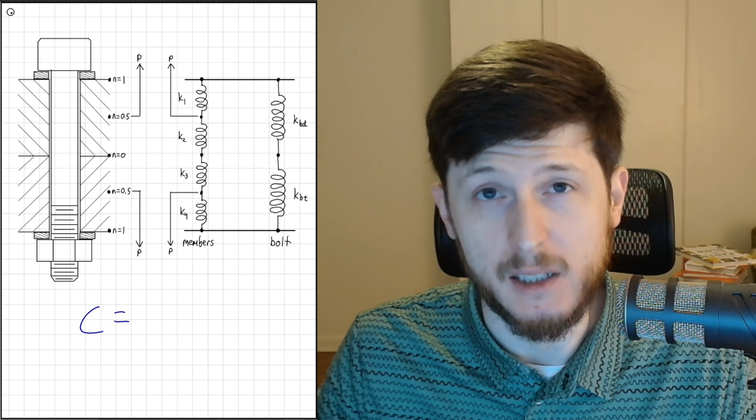This works because everything basically acts like a spring. The bolts are elastic. I'm not really going to get into how this works here. You'll just have to take my word for it, but just know that the stiffness constant is the bolt over the bolt plus the members. And so that is how the bolt ends up carrying 20%, and the members, or the energy that's stored in them, carries over 80% of any external loads.

So how do you measure preload? Well, the most common way, and you're probably aware of it, is the torque wrench. You use it to set the amount of torque that either is applied to the nut or the head of the bolt. It's not super accurate, at about plus or minus 25%. You might be wondering why we use it when most of the other methods are more accurate, and that's because it's easy, cheap, and most of the time it's good enough.

Another great way to measure this is with bolt elongation. That actually checks how much the bolt stretches under a known load. You can see here that bolt elongation is plus or minus 5%, which is way better, but it's much more difficult to actually measure. So here's a slightly closer look at bolt stretch, since that's what we're going to be using today to check how much of our torque actually turns into preload.

The formula here is deflection is equal to the preload times the length of the bolt that's actually in the grip, which is like in this area, all over the area times Young's modulus. So it's not a very difficult calculation to get the deflection. It's just generally hard to measure because, as you can see here, it is impossible if you can't get to the end of the bolt, or if it's too far from the edge where you can't reach it with micrometers.

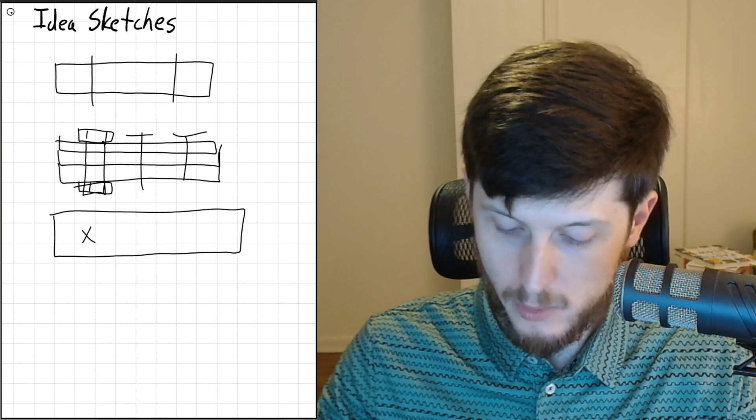Now I do want a row of bolts because in addition to checking how much preload is created when we torque the nuts, I want to see how much they crosstalk. And what I mean by that is when you torque these bolts, let's say you torque this to 50 inch-pounds, and then you move and torque number 2 to 50 inch-pounds, it will actually squeeze the members and it will lessen the preload in number 1. So as I go through here, I'm going to take multiple checks of the length as we torque these in a row, and maybe we'll actually be able to detect that crosstalk.

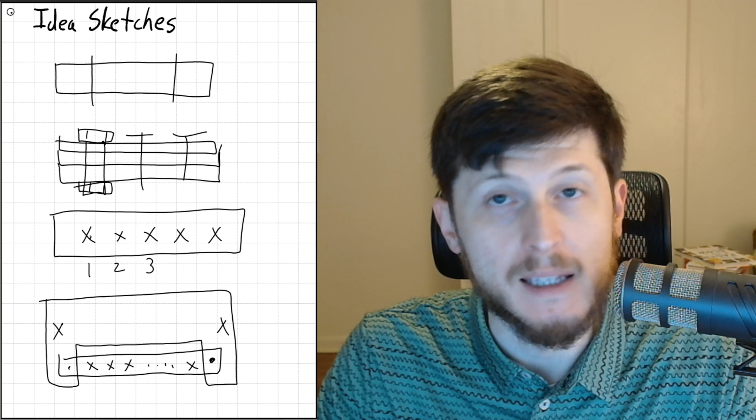Now, this is our basic member layout, and I'm going to have to hold this somehow, so I'm thinking about putting a U-shaped board that I can lay this piece across. So we'll have our bolts going across here. We can bolt this down. We will C-clamp this to the edge of the workbench right about there. I think that's pretty much it. I am going to do 10 bolts. That's a nice round number, and that's all the material I have. So that's how we're going to handle it. It's going to end up looking something like this.

We're going to make sure that the nut is on top with a washer underneath, so that way it will be easy to torque. I am going to end up using 1/4-20 hardware like this, so that way I can easily bring them to the right torque for the preload, because if I were to use something like 1.25" hardware, my arms would get pretty tired.

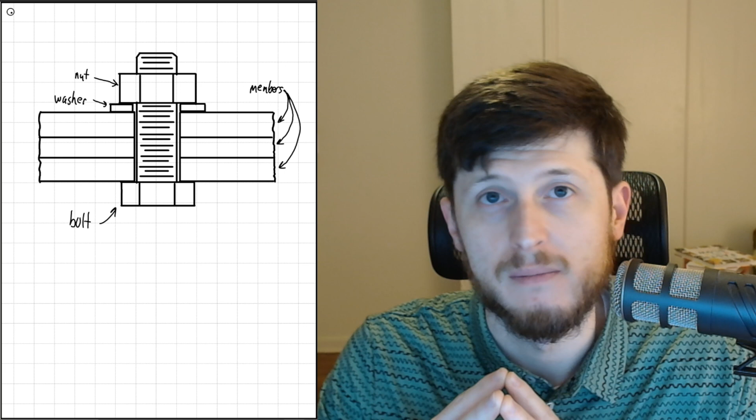Now that we have an idea of what our test fixture is going to look like, let's go ahead and do some calculations to figure out what the torque should be and how far we think the bolt's going to stretch before we actually find out in the test. So let's run through some quick math here. Nothing too bad, I promise.

One quick note is all of this assumes that I got grade 5 bolts. I ran to my local hardware store and picked some 1/4-20s out of the grade 5 bin. Apparently I wasn't paying too much attention, and now that I'm looking at them, they don't actually have those 3 lines that indicate that they are grade 5. They actually have text on them that has YC something or another on them. So these might actually be a lower grade of bolt, may even be 1 or 2. Let's see if we can figure that out.

I have the specs here for the different grade strengths, and as you can see, we're going to actually be shooting for 85 KSI as our proof strength if we were using grade 5 bolts. Our torque wrenches are roughly plus or minus 25% accurate, so that'll mean we'll end up somewhere between like 64 and 106 KSI roughly when we actually go to tightening these. So as you can see, we will actually be exceeding the yield strength of grades 1 and 2, and more than likely we'll be exceeding the tensile strength, definitely of grade 1 and maybe even of grade 2, depending on where in this range we fall.

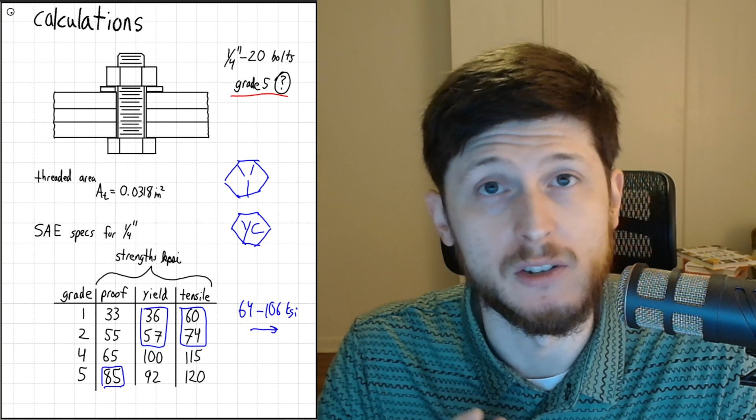So I believe it'll be fairly easy to tell if we ended up with grade 1 or 2 bolts, because they'll either permanently deform because we've pulled them into the plastic range, or they'll just completely fail. So I think we'll be able to tell. We'll do a quick check before we actually start running the test to make sure that I have the right hardware.

Now, assuming we actually have grade 5 bolts, you can see that the preload force here will be 2,000 pounds. Seems like quite a lot for a quarter 20, doesn't it? I'm going to be shooting for 75% of the proof strength here, so that way I can reuse the bolts because I plan on torquing them several times. If you weren't, you could run this closer to 90%, but I've gone ahead and chose 75 for this test,

2,000 pounds. Here's the required torque: the 0.2, which is the dry zinc bolt torque coefficient, times the preload we're going for, and then the nominal diameter of our bolt, which is 1/4 inch. So we have 101 inch-pounds as our initial torque that we're going to be running through. We're going to be doing zinc plated dry bolts first, so we'll use 0.2, see what that does. I plan on doing 2 or 3.

I'm definitely going to do zinc plated and lubricated to see if we can detect that difference. I have a suspicion that not only more torque will be turned into preload with the lubricated bolts, but the scatter between the points will be much less when it's lubricated. We should be able to detect that with some fun statistics when we're done on our results. If I can, and I plan on it, but no promises, I'm going to do a moly test as well because it is much lower on the torque coefficient.

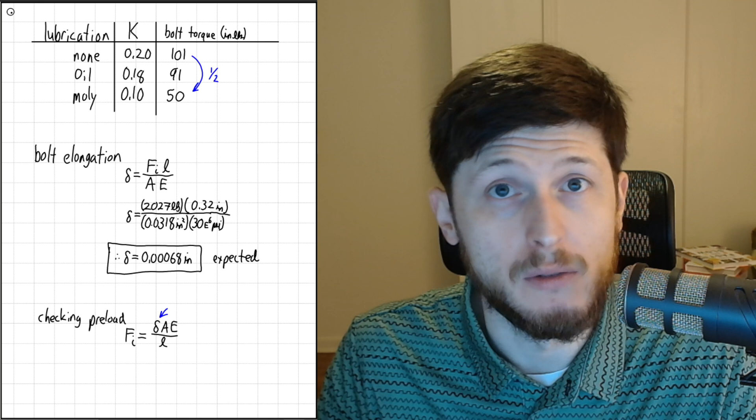I think that's about it. Math wasn't too bad since we don't have to worry about how well this joint is going to work. We just have to worry about what preload we're ending up with. So now that we know what to expect, let's head over to the workbench and get started.

So I just got back from the hardware store picking up everything we're going to need for the test. And now I know this doesn't make sense at first, and that's because these are actually legumes.

Holy crap! So now I've gone ahead and punched the rest of these holes. And as always, after you use your impact punch, it's very important to remember to go back and deburr your holes. If you don't deburr your holes, I'm going to find you. And so now it's time to go ahead and cut this to length. Now that the holes are done, I'm going to make 3 of these because that's how much material I have.

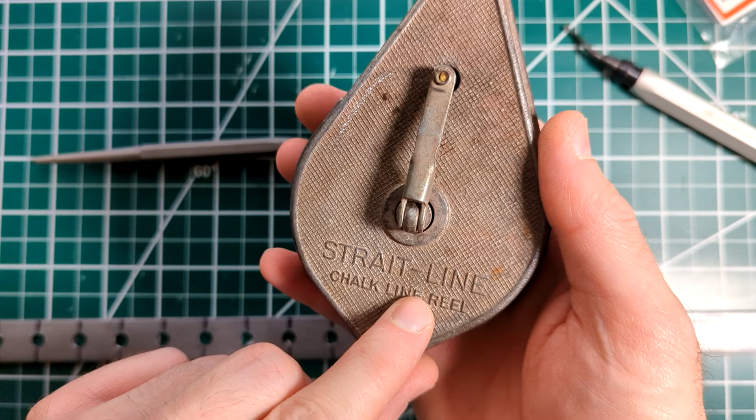So let's go ahead and get our straight line out. It's very important that you get the straight one because you don't want curved cuts. Let's go ahead and get this done here. Oh, there we go. And as you're all aware, benefits of the straight line include already smooth edges. No need to file.

So I'm going to go ahead and get this ready, recharge it for the next cut, and I'll be back after I finish making all 3 of these. I have left enough space at the end to do the mounting holes, but we will sort that out once we get the fixture made to hold these members. So now we have our 3 parts here. Let's go ahead and do a quick test fit, make sure everything went well.

Wait a minute. Some of these holes don't line up. Who made this? To whom it's about to concern. These parts don't fit, and you should be ashamed that they left your shop. You are clearly certified to ISO 2015 instead of 2008. Send. You've got mail.

Well, it looks like that email did the trick. Got that sorted out. Turns out that the punch he was using was not in calibration, so sent that out to be recertified, and what do you know, now everything lines up. Even got the mounting holes thrown in for free to make up for the poor job the first time. These are going to hold this member set here in our fixturing when we go to do all of our testing, and we're going to be making that next.

It's times like this where I remember how soothing it can be to watch a master at work.

We have everything bolted into our fixture here, and as you can see, we should have enough room to get a wrench on the bottom and then put our torque wrench on the top. The next problem we're going to run into is the top of these bolts are not very flat, so it's not going to make a very good place to use my super accurate precision high dollar no name micrometers on.

So what we're going to do is we're going to end up stacking 2 of these nuts just so that way I have a reference, and then I'm going to file the ends of these down flat, and that should be good enough for what we're doing here. There we go. That ought to do it. 1 down, 9 to go. Also smoothing out the tops. That should be good enough.

Now we'll be able to more accurately measure the length of them with the micrometers, since it'll be able to sit square. Here you can see it mounted in the micrometer. It's actually pretty good. Can't see any light going through it on either side. I would show you with the flashlight, but unfortunately I don't have 3 hands, so you're just going to have to take my word for it. But we'll do this to all the bolts so I can get accurate before and after length measurements, and then we'll get testing. So before we get started measuring our bolts, let's verify our tools.

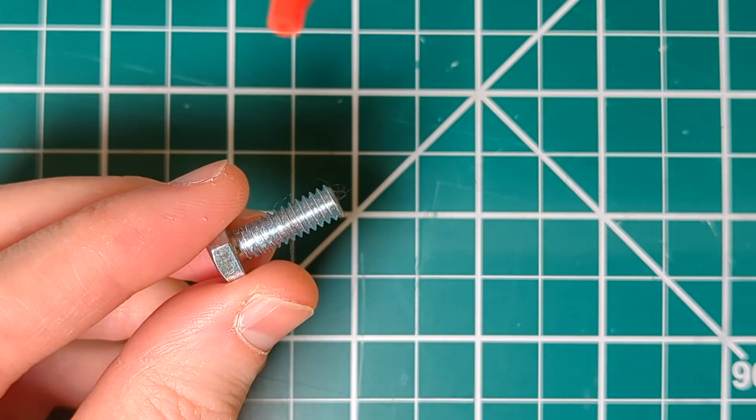Setting up the torque wrench for the ARP Ultra Torque test, it only takes 50 inch-pounds, and that is the lowest this torque wrench goes to. Now generally it's better to only use your torque wrenches between 20 and 80% of its range for the best accuracy, but it's far too late for me to go back and start over with larger bolts to stay in the good range. So we're just going to see what happens.

Oh wow, that barely feels like I'm doing anything after the first 2 tests. That's considerably less torque. I mean, it is half. It's actually even slightly more preload than the oil test at half the torque. Hey, what do you know? The math worked.

After many clicks, I'm back with the results. We've got the dry shown here with the 0.2 coefficient of friction. Quickly, you will note that there are some columns that are much lower than expected, like number 2, 5, and 6. After inspecting the members, I believe that this is because the bolts were contacting the side of the holes, and so they weren't actually developing the amount of preload they should have.

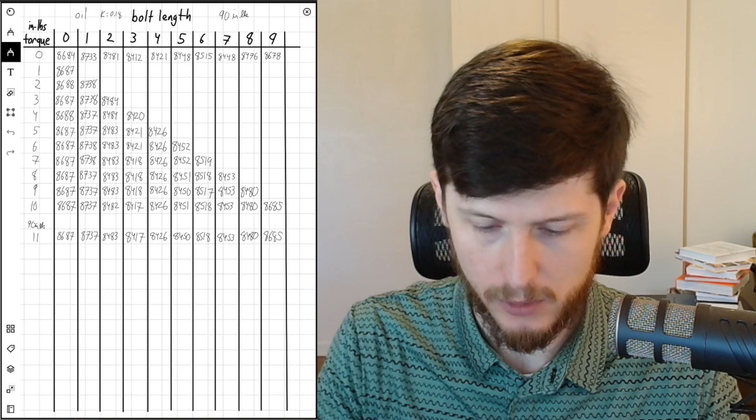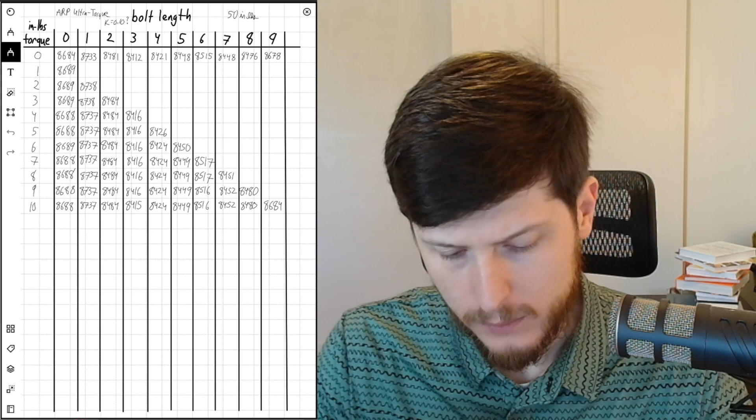For our last test, I got the ARP Ultra Torque. I assumed a K value of 0.10. Notice the question mark. It's because I couldn't find what the torque coefficient actually was for this. So I guessed, and I was wrong, as you'll see in a minute. Here are these results. We only had to go to 50 inch-pounds instead of the 90 and the 102 because of the much lower coefficient of friction.

Let's jump over to the actual results here. We got the dry results here, the oil, and then our ARP Ultra Torque on the far right. You can see that the average of each of these is plotted here. We have the actual target preload that we were going after, the 2,027 pounds. You can see the standard deviations: the dry was 600 pounds off, 458 pounds for the oil, and 388 pounds for the ARP. I believe that these means are off because I assumed the friction factor incorrectly.

So I could calculate the friction factors and go back and redo the tests, but I don't want to do that. So instead, I've cooked the books, but just a little bit. What I did was this offset here, I added those back in to the results to just kind of make the mean along the actual target. And then you can see the scatter decrease as you go from the dry condition to the oil to the ARP torque.

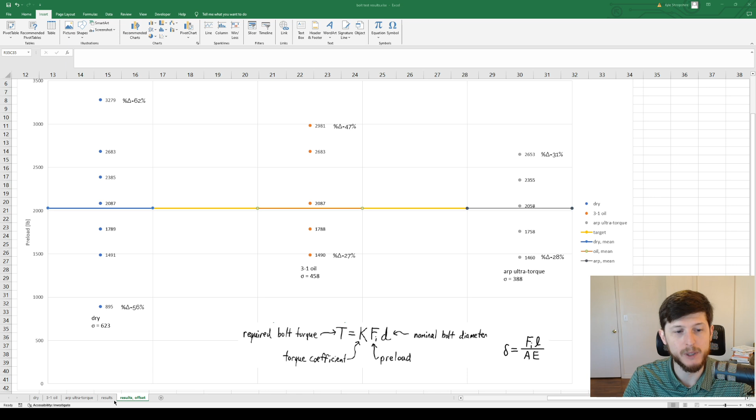But even with all of these inconsistencies, you might say, I still can see in the data the improvement you get from going from the dry condition to the oil to like a moly based lube or the ARP Ultra Torque. So I am glad that I did this. It took way longer than expected.

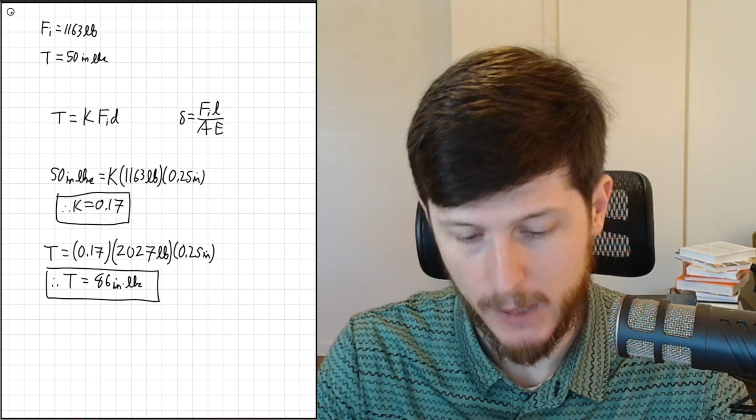And I guess if I really cared, we could figure out what the torque should have been for the ARP. I know my average preload from my statistics, and I know the torque that I put in. So using our formula, torque is equal to the torque coefficient times the preload times the nominal diameter. We actually don't need this because we're measuring the deflection. You put that in here, and you get K is 0.17. So putting that back into our first formula, instead of 50 inch-pounds, I should have put 86.

And this probably would have moved our mean much closer to the target and been a more accurate representation, because I did just guess on the torque coefficient, and I was wrong. It was actually much closer to the oil than I expected, but even so, the standard deviation, the scatter between the points, was still less.